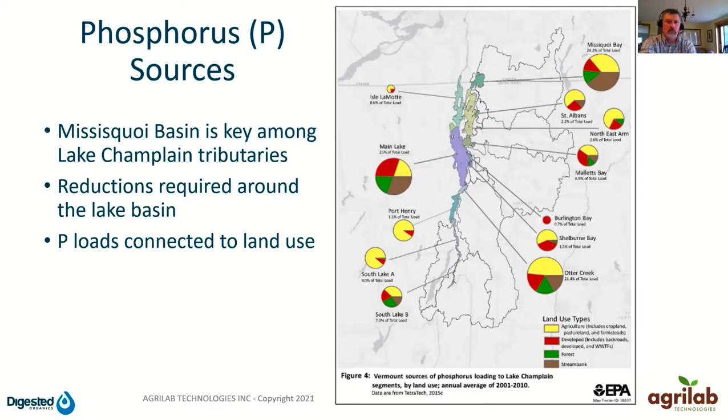Our company's based in Franklin County, so it's a lot of our effort you'll see is focused there.

So this issue has not gone away. There's been a lot of great work, not only with farms, but with all areas of developed landscape, conservation practices. But for multiple reasons, we have not made as much progress on phosphorus reduction in recent years as people would like to see, given the amount of money that's been put towards this.

There's been a lot of great research on trying to identify the most sensitive parts of the landscape that are, whether due to soil type, slope, or their land use, have a disproportionate amount of phosphorus loss into these different rivers and ultimately Lake Champlain.

Phosphorus, you could say, is sticky. It is not, most of phosphorus are in forms that aren't soluble. So nitrogen is more soluble in terms of being percolating or infiltrating through the soil profile, or being volatile and leaving as ammonia as a gas, where most forms of phosphorus are physically attached to soil particles.

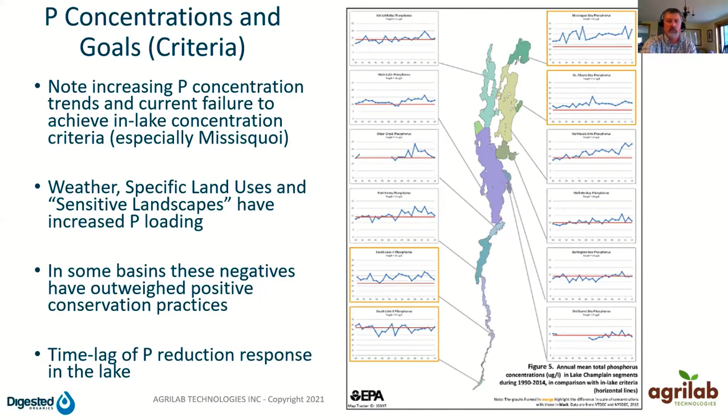You may see improvements in a watershed that you've established more tree buffers, there's been good land use practices, but because that phosphorus in the sediment is now embedded in the river and lake channels and then in the bays, there's continuing to be phosphorus cycling in these water bodies, so you don't see an immediate downstream water quality response.

Another way to illustrate this is different watersheds obviously have different land uses. You can imagine Chittenden County is a lot more developed land use. So in the Missisquoi Basin in particular, there's a lot of loads that are related to agriculture, stream bank, which is a combination of in-channel and bank erosion, and forest.

Typically forests don't generate a lot of phosphorus per acre, but in a lot of these mountainous and large rural watersheds, they cover quite a bit of the land use or land area. So they add up to be a significant total.

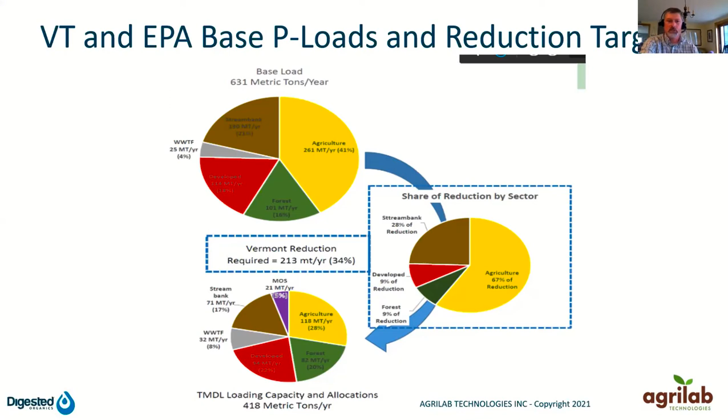So again, some of the conservation practices and programs, both through regulatory and incentive programs, have been trying to address this. But I believe the intent of the Vermont Phosphorus Innovation Challenge was to try to find yet other pathways to come across some solutions to address this phosphorus loading issue.

So just some broad methods that have been incorporated in those existing programs and general best practices in general is strategies that have been known and need to be employed in more widespread.

So manure applications are obviously a big one related to dairy and livestock agriculture. You've got an existing winter spreading ban in place for part of that. A lot of the nutrient management plans talk about setbacks from streams, application rates, and other things, combined with good soil building practices.

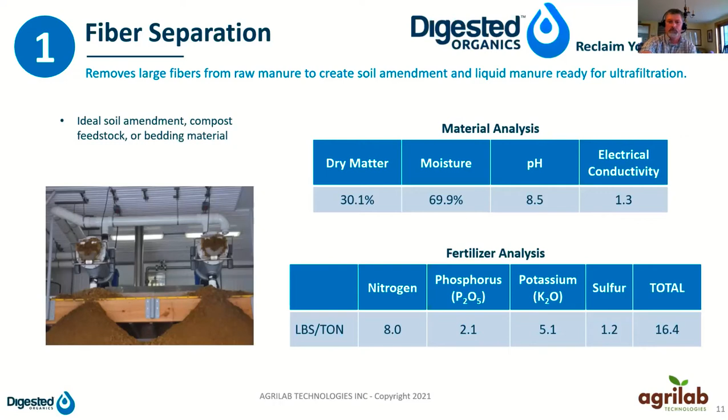The ultrafiltration then takes the resulting liquid that's had the coarse fibers removed, and runs it through these devices to squeeze out or permeate the water or filtrate, leaving a thicker sludgy concentrate at the center. In manure, the biggest fraction of the phosphorus is held in the fine particulate. You may remember I said phosphorus is sticky. It sticks a little bit to those coarse fibers. Some of it stays suspended, but the biggest fraction sticks to these fine particulates, the small amounts of organic matter.

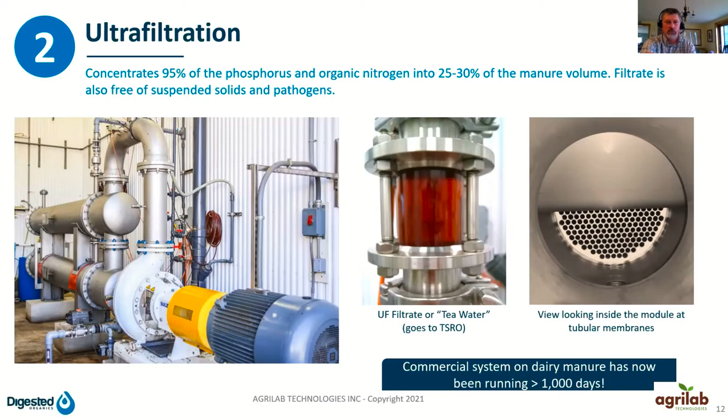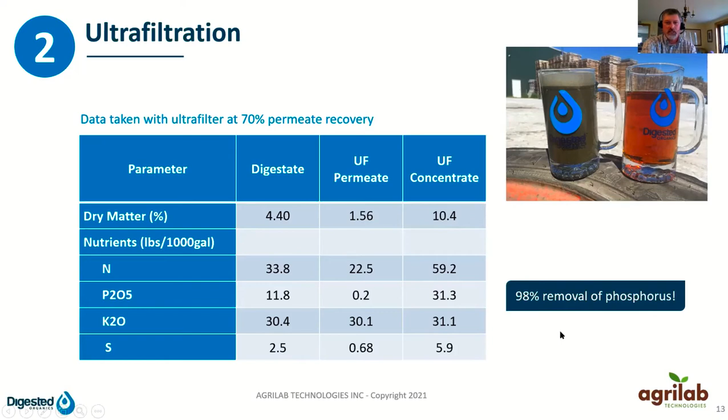Most importantly, 98% removal of phosphorus in ideal conditions.

So the conceptual high-level benefits are that you're able to have your phosphorus concentrated in different forms, and you can target where that's applied to the fields that have the phosphorus need for growing corn silage or other crops, applying at higher rates that permeate and distribute it. Oftentimes the fields closest to the barn have had historically more spreading of manure and higher soil phosphorus levels, so you can apply less material to those and more material to the fields that are further away.

This is one of their full processes, sites that actually take this step all the way from dewatering to the ultrafiltration to the permeate, an additional reverse osmosis step, ultraviolet disinfection, and then can discharge clean water to a waterway. I believe they've been permitted to do this in one or more sites in Wisconsin.

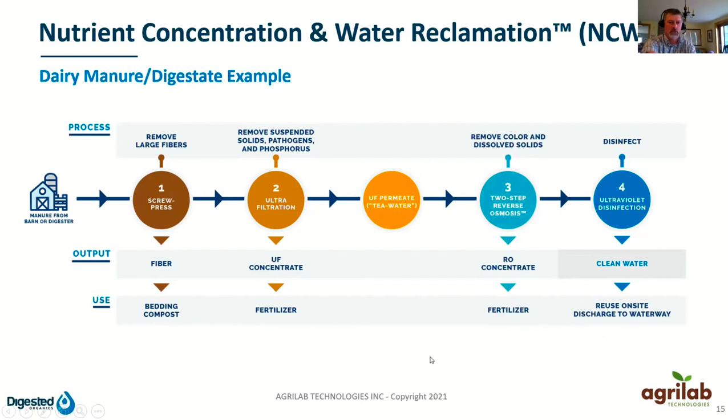What we're doing here in Vermont in collaboration with Digested Organics is this more three-step process. So with 1,000 gallons, you remove about 10% of it in terms of those coarse fibers, and the remaining 900 gallons gets sorted into about 225 gallons of concentrate typically, and that permeate in most cases will just go back to the manure lagoon and get land applied as previously.

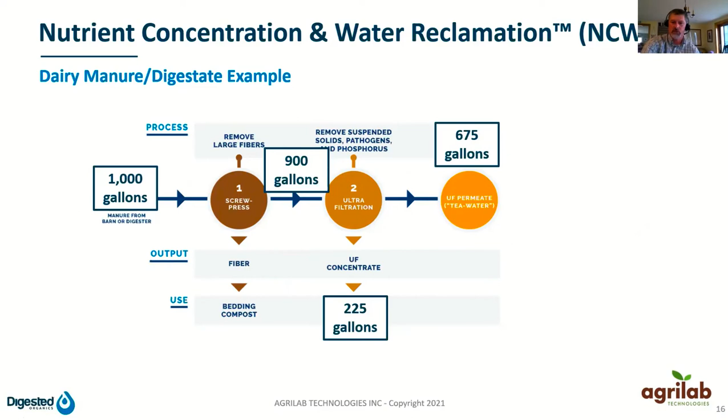So we teamed up in stage 2, and they were happy to work with us to see if we could blend their concentrate into batches. We started the mixing at a bucket scale, 5-gallon bucket scale, then we went to the bucket loader scale and did different scale batches. You can see the recipe there: about 10% concentrate mixed in with separated manure solids and some wood chips. It turned into a good batch that physically looked very similar to other compost that you would normally buy.

Most importantly, 3 times the total phosphorus, giving a fortified compost product appropriate for applying to a field that had both a need for organic matter and for higher phosphorus fertility. Certain crops like corn silage, peppers, pumpkins, and hemp still have a significant fertility requirement for phosphorus, so those may be some of the best matches for a product like this.

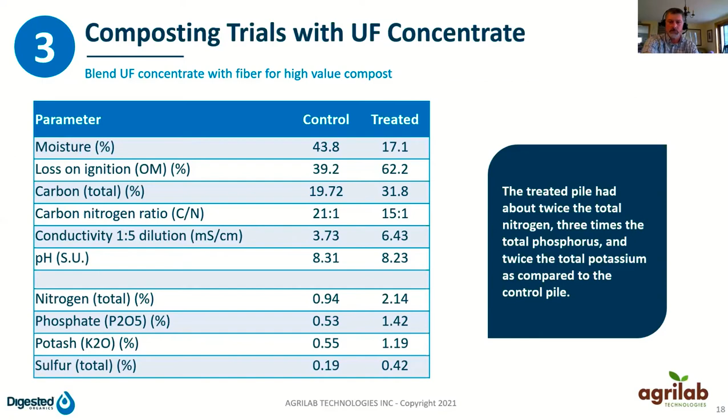Digested Organics also did some modeling of how they could set this up and replicate it in Vermont. This is some work I believe they did with Middlebury College, looking at different places in the Missisquoi Basin in Franklin County, in the Winooski River Basin in Chittenden County, and down in Addison County, Otter Creek, where they could have centralized facilities and potentially bring in phosphorus concentrate from a range of farms, do some centralized processing, and then redistribute it.

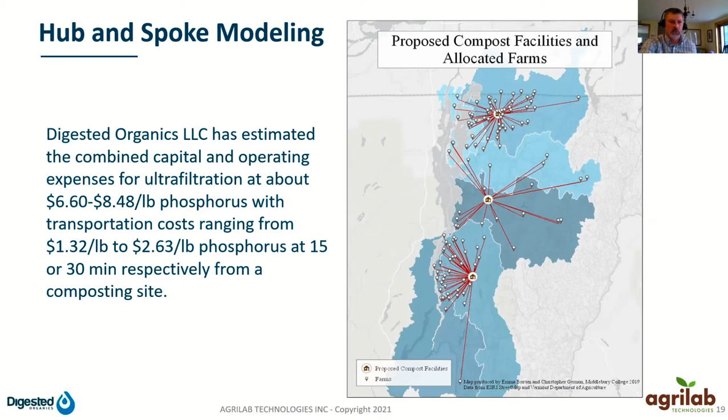So at least they set up a conceptual model and did some estimated costs.

In parallel, we were doing our own work and got to collaborate with Digested Organics on some pieces of this. Our company has been working on composting projects for a number of years, and our biggest focus is on systems that both aerate compost piles and recover heat. The primary benefits are process acceleration and control, but we're also able to extend winter operations and use the recovered heat from the process, just like solar thermal or geothermal, where we get heated water and glycol, and we can heat greenhouses or shop floors.

Preheat wash water on farms. And then more recently, we're applying that to a second heat exchanger to dry down compost or other products before they're screened, bagged, or transported. So using these processes and equipment we've developed, we thought this project was a good fit because we're dealing with these high moisture, dense products. So how can we add value to those?

So we set up some prototypes in stage 2 and got to work, as you saw, with the sponsor Vermont Natural Ag Products, the Foster Brothers Farm in Middlebury. We tried to do a number of prototyping tests for everything from the process to the products that would be attractive to end use markets, but also economical to make.

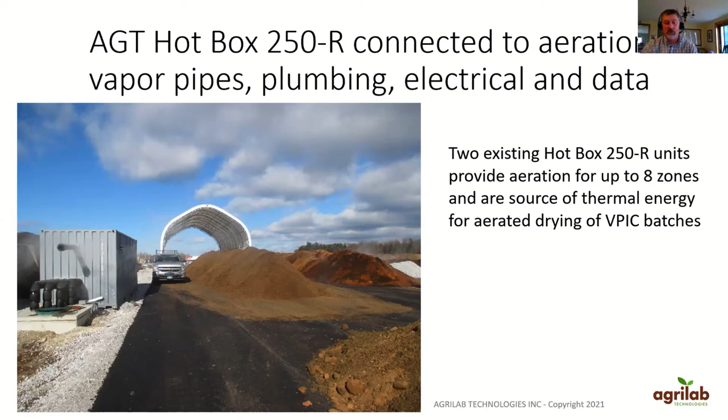You can see in this slide, the shipping container is where we have our aeration equipment, which I'll show you an illustration of after this, but it pulls vapor through those piles out on the pad, through pipes underground, up into the container, through a blower and heat exchanger equipment, and then you can kind of make out the steam coming out of the pipe at the top of the container - that's exhaust coming from those piles sitting at the pad.

This schematic or process flow diagram shows that in a little more detail. You can picture this equipment sits inside that shipping container. We have different ports that this connects to for the piles out on the pad. There's an aeration blower that provides the suction to draw fresh oxygen into those piles so that it speeds up their process. It draws that vapor across a specialized heat exchanger in the center of the equipment.

That's where the water and glycol loop is heated up for on-site use. We also have a lot of sensors on here, so we're able to track temperature, oxygen levels, flow rates, and use that to adjust controls in terms of how long each batch is aerated and at what level of fan power.

And then ultimately, through controlling a series of valves, we can either exhaust the vapor out to the air, like you saw that plume of steam, or if a pile is cold or freshly mixed in the winter, we can push hot vapor into another pile in order to boost its temperature, get it started, and not have to be in cold winter hibernation mode.

The takeoff, again, is this water loop. So here we've got a water loop that could go anywhere - to heating the shop floor or bagging building on the site, or to a second heat exchanger where we can heat up ambient air and direct it through positive aeration into these piles.

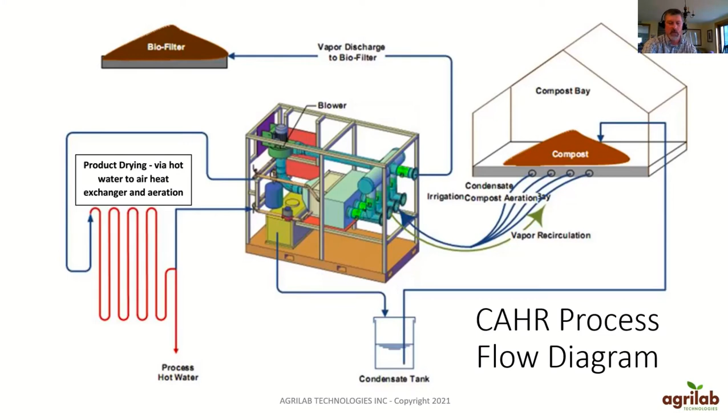But 150-degree air being forced through materials certainly is a good batch drying process, and we were able to show that. This next slide illustrates the source of energy we're working with. It's a cool looking picture - it's actually their straddle turner just went through the windrow, so the pile gets all blended and mixed, but you can see how much steam, both water vapor and carbon dioxide, is released when that happens.

For the piles that are solely turned with windrows, they may turn it 14 times over a 4 to 5 month period. With the aeration, they need to do it less - maybe 6 times over a 2 to 2.5 month period. The point is, all that steam and energy going off into the air is instead being pulled through that pipe network into the heat exchanger, anywhere from 10 to 12 times a day based on a time schedule. So that's our thermal input, that's our energy input to the system, and that's what we're taking advantage of here.

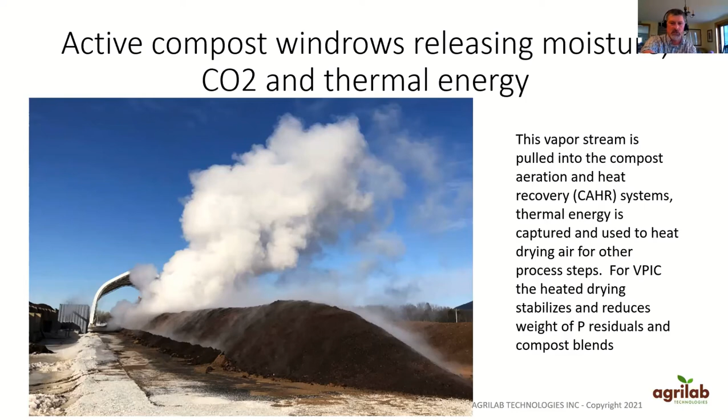And in this case, for VPIC, we were directing that energy to drying down some of those phosphorus residuals, concentrates, and compost blends. All right, now here is the concentrate.

This was at the bucket scale blending when we were first trying to figure out the best proportions. This is the concentrate from digested organics. You can see it's a thick material, but it's very homogeneous and it flows. So in that sense, it was the most attractive phosphorus concentrate or residual to incorporate into a compost batch. Again, impressive that 95% of the phosphorus is concentrated into that original 25% of the liquid manure.

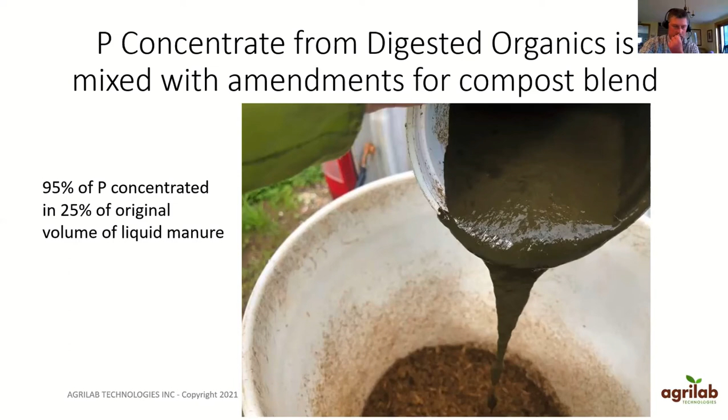We talked about the DVO dissolved air flotation sludge. This is also very effective at removing phosphorus from the material, but it was very difficult to then handle this material and incorporate it into a compost blend. We literally had to use 3 times as much amendment - wood chip, bark, sawdust, manure solids - a lot more physical mixing and handling up front to try to get it to blend in. It made a decent product in the end, but all that cost didn't make it attractive to continue making compost blends with this as an input.

The other factor is these DAF sludge materials typically also involve a polymer to enhance thickening and phosphorus recovery, whereas the digested organics ultrafiltration project is solely mechanical. Some of our end use markets are targeted towards organic agriculture, and use of the chemical polymer would prohibit that from being used. So it limits some of the end market potential.

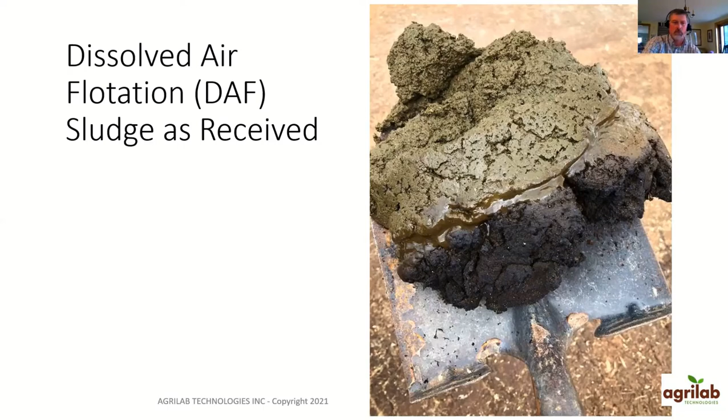I think it could be a successful product. I don't think it has as high a phosphorus recovery rate, but it already kind of looks like compost or manure solids, so in terms of incorporating it, it could have some good potential. It was just a little dense. So the drying and aeration was a potential benefit of working with this product, and perhaps we will in the future.

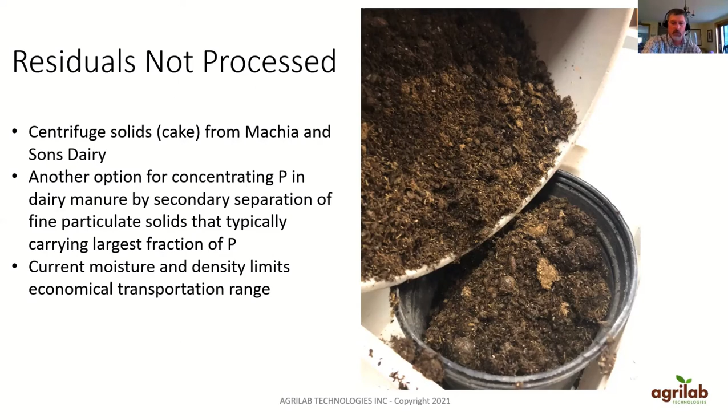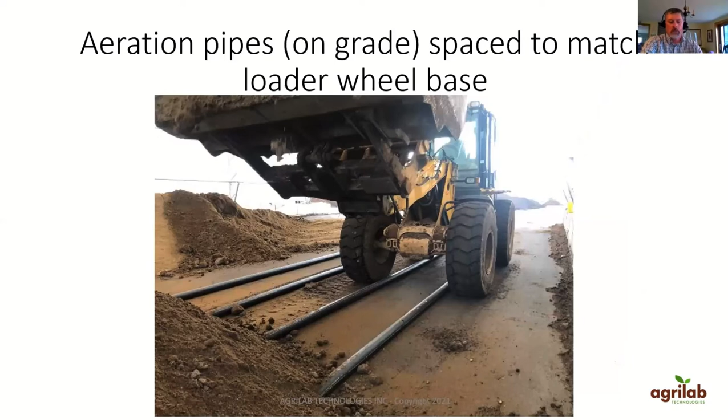And that was the benefit of pushing the heated air through these batches after they reached their targeted time and temperature to be called compost and kill pathogens and weed seeds - but it also dried down the product further so it could be more easily stored, blended, and transported.

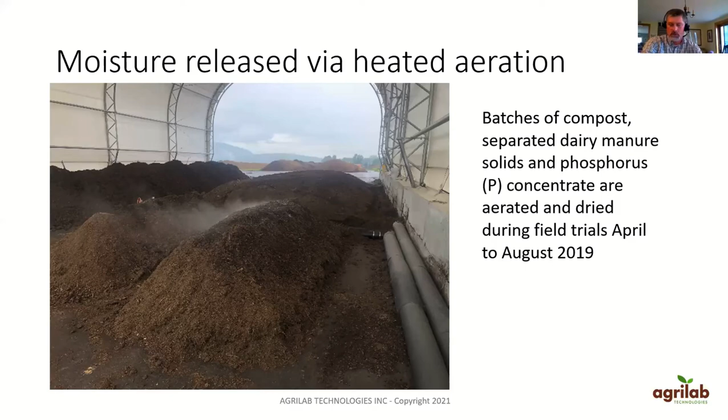Just another shot of that. You can see in the background, that's our trailer that had the temporary aeration in it.

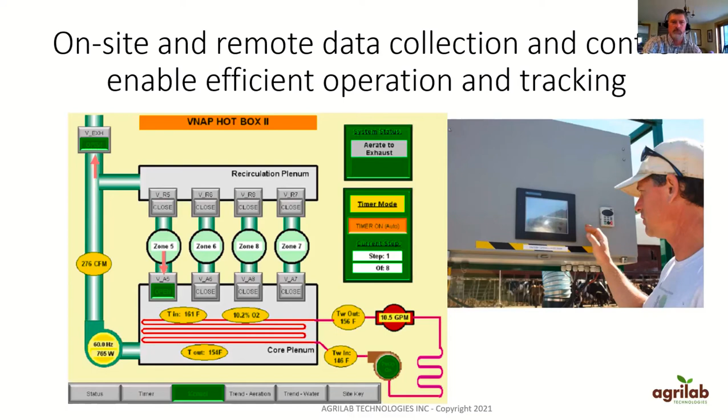All right, so on to stage 3. So that's where we are. We did the stage 2 report back in late 2019, and we were very fortunate to get accepted for further funding. The premise of the stage 3 effort was to set up a network of on-farm sites to do a mixture of some of the processes and create some of the blends we prototyped in stage 2.

So one of our goals was to try to collaborate more closely with Digested Organics. Compost certainly has phosphorus in it, but for us to start moving more meaningful volumes of phosphorus, we needed to collaborate with them to get that concentration.

This is a good map that illustrates our focus in northern Vermont. We continue to use a range of sites in different watersheds and counties. Foster Brothers, Vermont Natural Ag Products in Addison County, will primarily be a partner later on with distribution, once we start to create larger volumes and consistent products that can meet the quality demands of their existing line.

And then the red star is up in Franklin County, one of our partners nearby for where we're based, the Magnan Brothers dairy. Missisquoi in northern Lake Champlain has some of the highest phosphorus loading rates, so it made a lot of sense for us to focus our early efforts there.

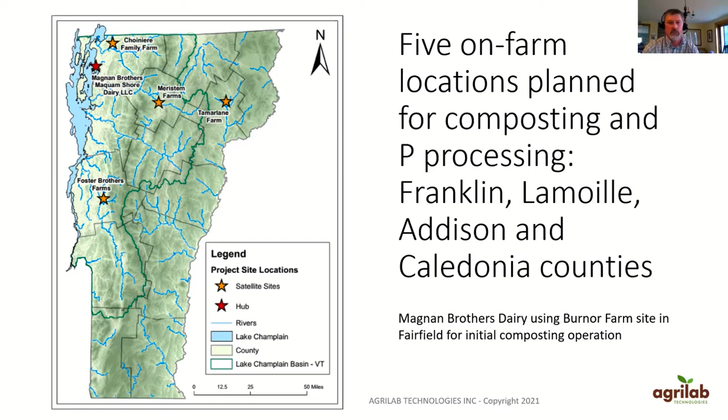Other farms shown here have other needs, either as producers and/or end users, or would be good distribution points in addition to using it themselves. So again, we're trying to not only show that this is technically feasible, but more importantly, actually economically viable. That's really what we're digging into now, trying this collaborative approach between a network of sites.

So as we got into this phase 3 activities, we looked at the different partners who signed on to support the project, and then got into the specifics of where the most viable processing and composting locations were on their farms.

Tamarlane Farm has gotten a lot of discussion in the last several days. It's a smaller farm, so we're not necessarily looking to make our most of our product there, but they could also incorporate some of the blends into their process and be an end user themselves.

Just running through quickly some of the site details. Each of them have their own unique aspects. The Magnan Brothers are a dairy farm based in Fairfield, but they have a second milking facility and dairy in St. Albans. That gives them, they were space limited at their home farm in Fairfield, but this also gave them crop access down near St. Albans Bay that can have different weather conditions.

So it was a bit of a hedge in terms of weather being slightly better or worse in the two towns at different years. But ultimately they are interested in the manure separation, both for saving bedding, but this was a new opportunity to diversify their farm revenues and activities and potentially use the heat recovery for composting. So we have a site that we scouted out there, and Jason McCune-Sanders on our team did some mapping and drawings.

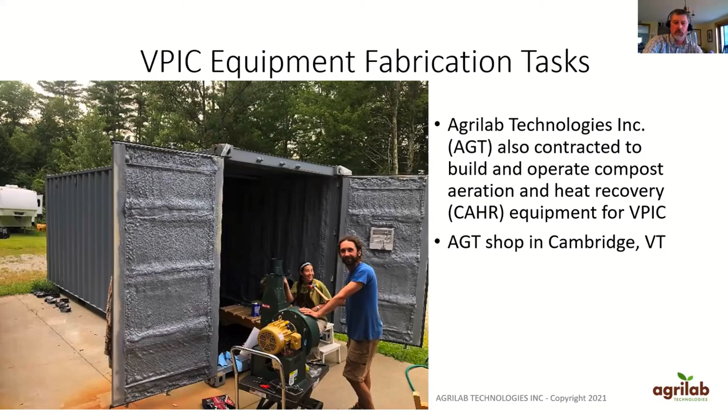We're mounting this equipment into a 20-foot shipping container that will be deployed at one or more of those farm composting sites. And being the title of the presentation, I wanted to make sure I answered the question: why are we using compost heat recovery? I think I've covered it fairly well, but again, we're able to move around to these different sites with this modular equipment.

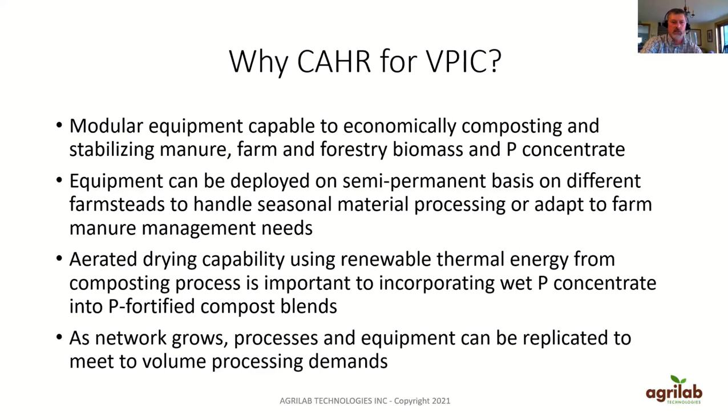It can be redeployed if the circumstances change on any of the individual farms, or if it's just a seasonal need. And then we can use that renewable thermal energy for that drying process, again to incorporate more of that wetter, denser concentrate into these blends, and try to make it replicable if we're able to have an impact beyond these initial sites and make it more statewide.

Again, the thermal energy - Jason's working on the plumbing system in the unit for this project. That's how we distribute the water and glycol around the system, whether it's heating buildings on site or, in this case, more so for the product drying.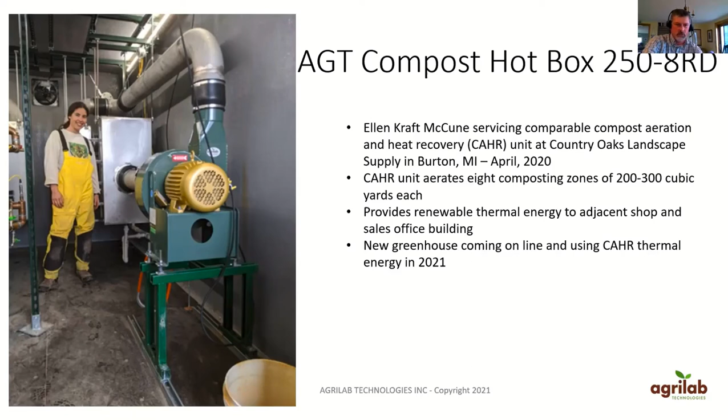I think they're running something like 30,000 or 34,000 yards a year with this single piece of equipment on the aeration, and it's really sped up their process. It also provides heating to their adjacent shop and greenhouse and sales building, and they've just built a greenhouse and are going to be plumbing in that for the heat as well.

Just to show what it looks like - at the back of the container, these are where the pipes to the aeration zones come in. Jason is setting it up, and we have a sump at that site to handle any of the condensate from all that hot vapor in the pipes, as well as any leachate from the active bays.

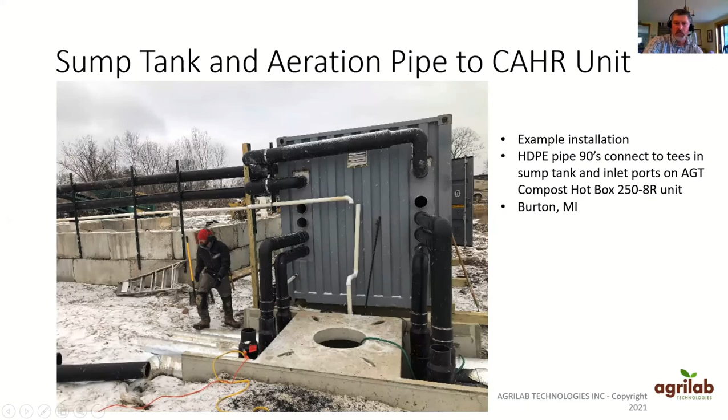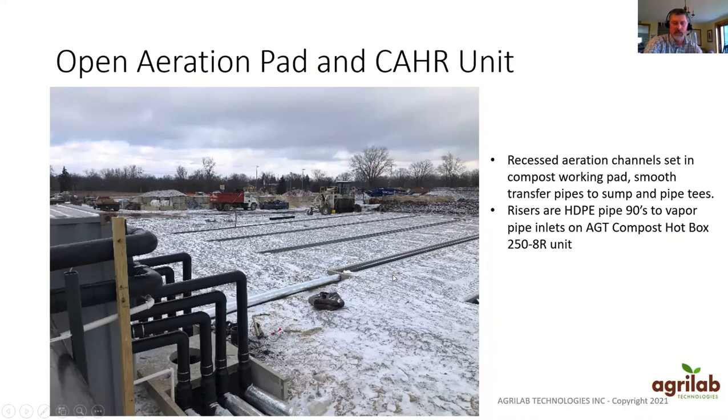Here's a view looking out towards the pad during construction. In this case, the pipes were built into recessed channels, so a bucket loader can run clean over it and scrape. We also do what some of you have heard called pipes on grade, where the pipes are set on top of the working pad, and the equipment just has to straddle it and avoid hitting the pipes.

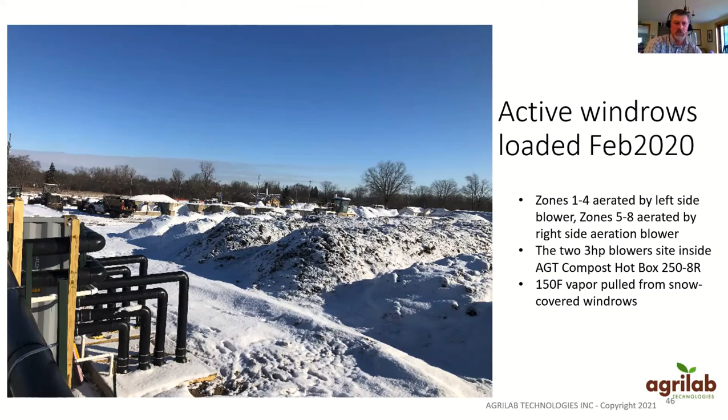Same view with loaded compost and even a coat of snow. I'm still amazed, even after years working in this, that you can have that cold fringe of the pile and it'll hold snow, but in that big core of the pile it's 150 degrees. The vapor gets pulled through pipes underground, up into the back of the container, and then we're heating the water and glycol up to that temperature.

Back to Vermont, zoom back into here. So this is what we've been working on this spring. Originally we were looking with the Magnan Brothers at that McQuam Shore Dairy site in St. Albans, but because they still had construction and cleanup work to do down there, one of their farms where they raise heifers and calves in Fairfield conveniently had an old feed bunk - you can see that big rectangle on the far right-hand side of this picture that was not being used. It even had a leachate capture at the north end, which allowed any runoff from the original feed storage and now compost to drain directly into the manure lagoon.

So we didn't have to spend extra effort setting up new runoff controls or leachate capture and treatment. We didn't get started with the full compost aeration heat recovery unit there first because we had to buy some pipe, so we used our temporary setup with that same compost heat wagon or aeration trailer to lay out some piles and get started making some batches this winter.

So we'd at least have some product ready for the spring. I said it was kind of like training wheels on a bike, because it was also great for the Magnan Brothers to get familiar - they had done windrow composting in the past, but this let them get used to building batches that would be good for an aeration system, figuring out straddling the pipes, recipes, and all those other nuances.

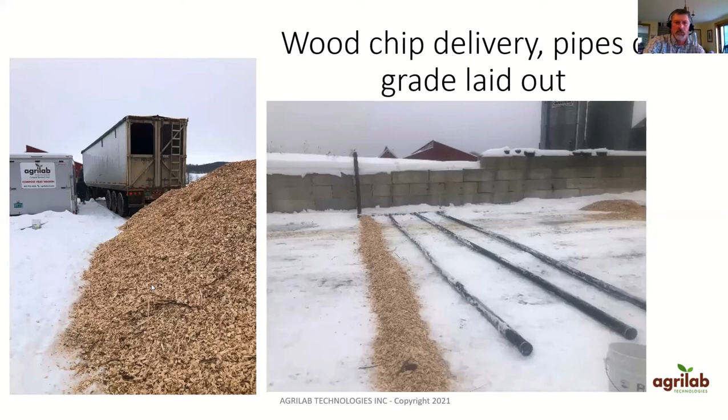So here's a picture of one of the batches we're making. Again, the pipes come out of the unit. We had a single aeration blower inside that was just pushing positive, so no heat recovery at this stage, but we got at least more familiar at this site with the aerated process.

And as Caitlin mentioned, the COVID delays - typically we'd get a pipe order in 3 or 4 weeks, but it was closer to 8 or 9 weeks to get the order in. May not have just been COVID - I think some of the pipes were going down to Texas and other places that had that big freeze in the winter, and a lot of things burst.

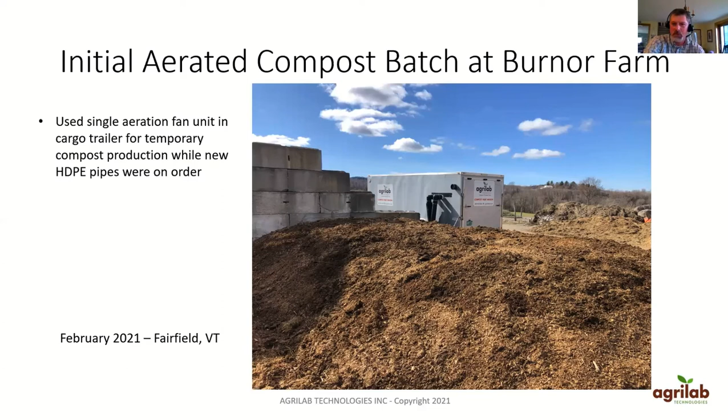These are just lovely compost shots for people who care about frost and steam coming off of piles on a cold morning. But point being, we did work out the aeration process to my satisfaction at this site, meeting all the time and temperatures to be considered compost - aerated system being 131 degrees or greater for 3 days.

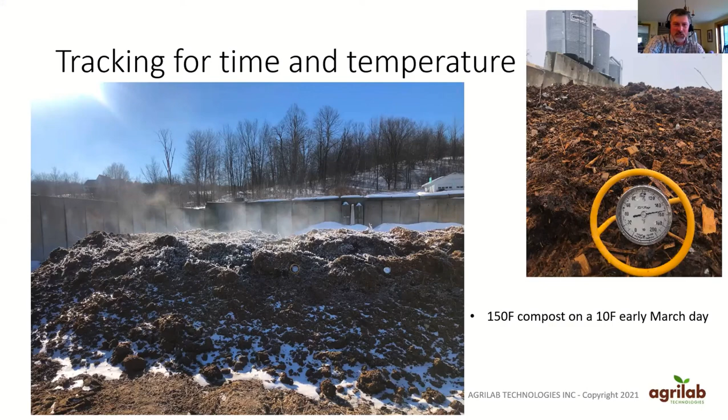So we've got composted manure mulch. Again, just a nice sunny day, a good farm picture of the setup there at the Burnor farm.

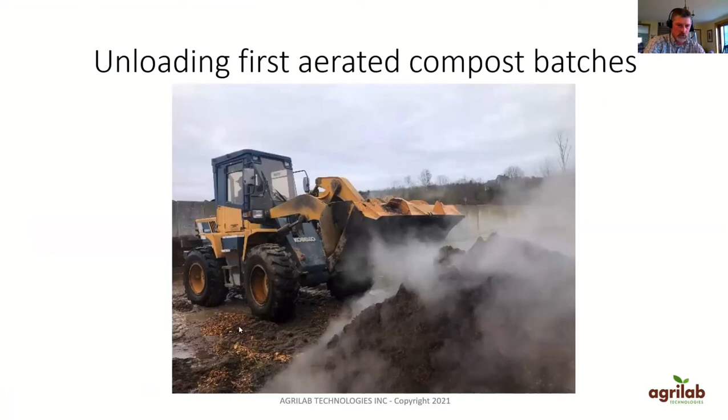Just in the last couple of weeks, we cleared off those existing aeration lines. You can see the pipe manifold just being exposed a little bit. So we're working with the operator to be careful breaking down the pile so that we don't destroy or break those pipes on grade.

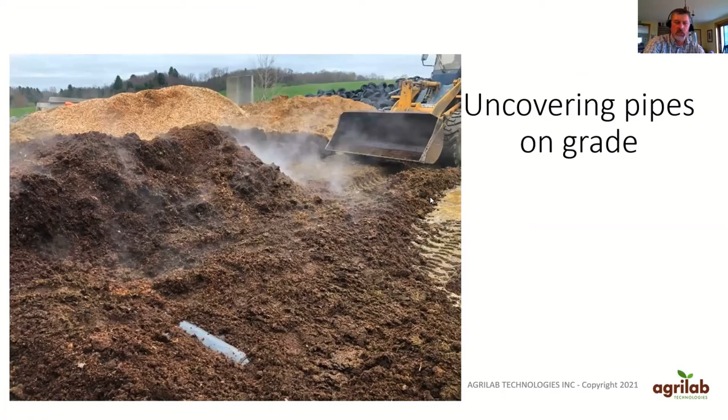And because there was a lot of chips in this, it won't be just manure, and we're not going to screen this batch. It'll be sold as a composted manure mulch.

So what's coming? Here's some drawings. This is to be placed in that same bunk - an overhead view in the top left, and a 3D view in the lower right. The pipes will go into the back of the container. It'll sit in that south end of the feed bunk, and we'll be able to do a series of aerated rows using the available space.

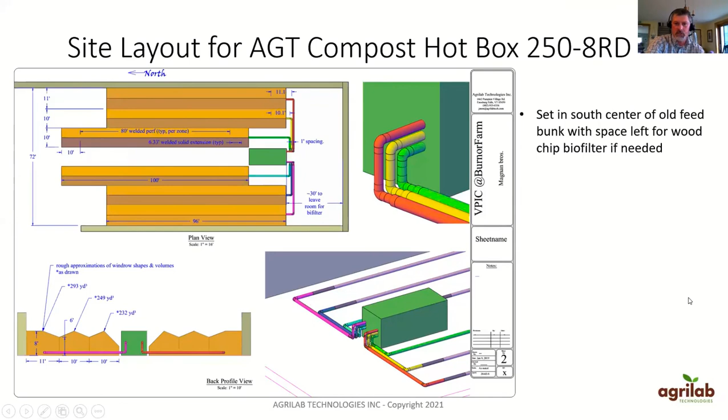Lower left, you can kind of see a profile of the different piles, with the hot box unit in the center. And just a shot of the unit at the shop with all those pipe ports that will connect to those pipes on grade. The ports at the top are where the exhaust comes out from the compost piles.

We are leaving space in that bunk to put in a wood chip biofilter if we feel it's necessary - either for odor control, noise, or not having a plume of steam suspiciously coming out of the back of our equipment in close view of the road.

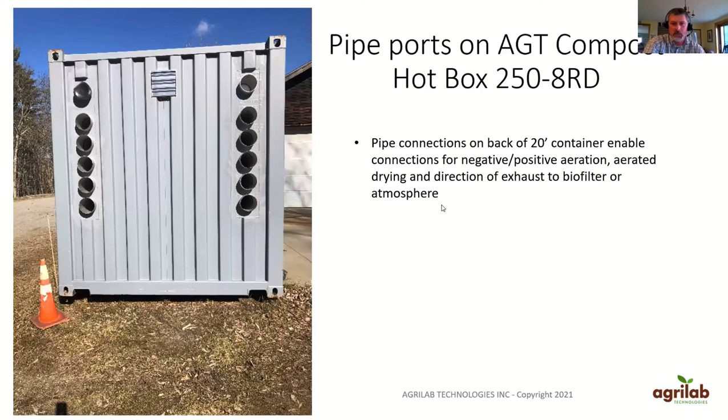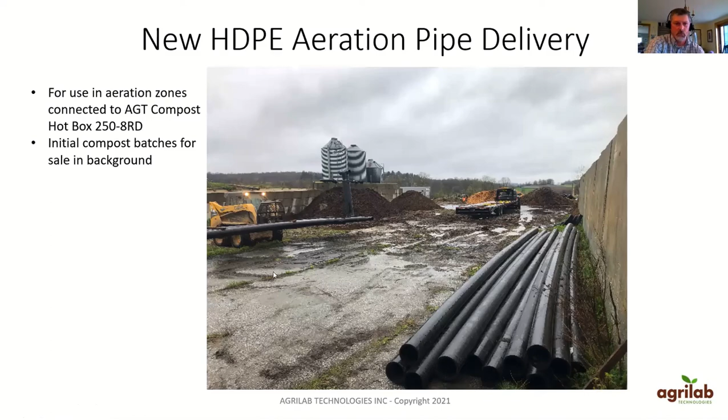So this is last Friday. The pipes finally came. They come from a company whose manufacturing plant is in Kentucky or West Virginia. These are some of the long perforated pipes that'll go under the piles, and these are some prefabricated sections with solid pipe that'll connect into the back of the hot box. We'll also do some fusion welding, a heat process to physically weld together those sections of pipe so they're more durable. We also use some Fernco couplings to connect some of the other joints.

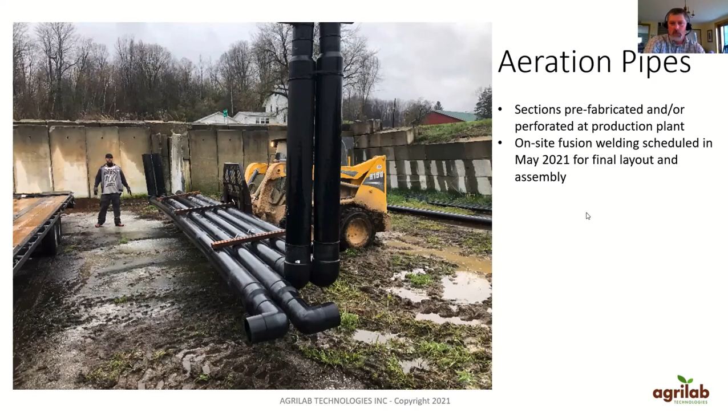So the last couple slides before we finish the presentation and get into Q&A circle back to the ultrafiltration. Our expertise is mostly around the composting side, but to really make impact with this project, we need that phosphorus concentrate in order to move more phosphorus out of the manure, get it out of areas that have too much, and get it to places that still need it in a form people are interested to use.

So this is a drawing of Green Dream Farm up in Franklin, near Lake Champlain, Chris and Annie Wagner's farm. They've been composting for years, but agreed to host the Digested Organics ultrafiltration unit. They've got their dairy barn and an existing screw press separator. The manure will go down to the ultrafiltration unit. Some of it, the permeate, will go to a manure lagoon, and these tanks in the lower left are where the concentrate will be accumulated.

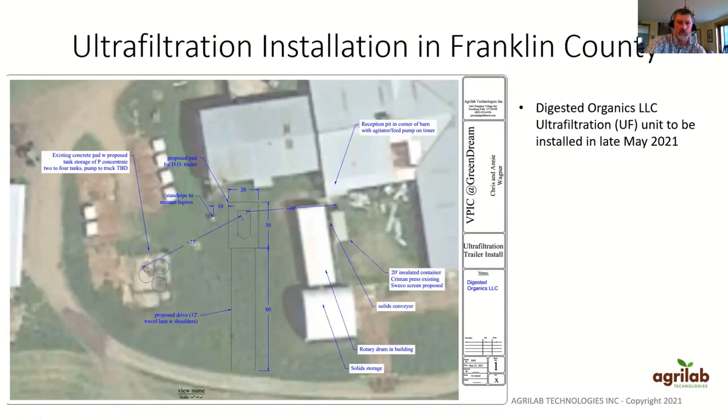We'll periodically, during the growing season, coordinate transportation to field applications, some field trials, whether for forages, hemp, sunflowers, or other things, but we'll also transport some to the Burnor farm for making those phosphorus-fortified blends. One reason we were happy to work with Chris and Annie at their farm is they already had a screw press separator in place, and they already had three-phase power, which the ultrafiltration unit required, and not all farms have.

And again, this is the first step. The liquids after the screw press, or primary separation, go into the ultrafilter, and that device is far more effective if you're not clogging it up with the coarse fiber.

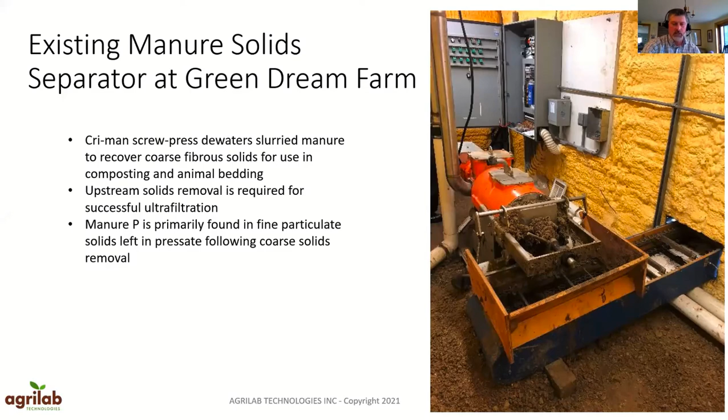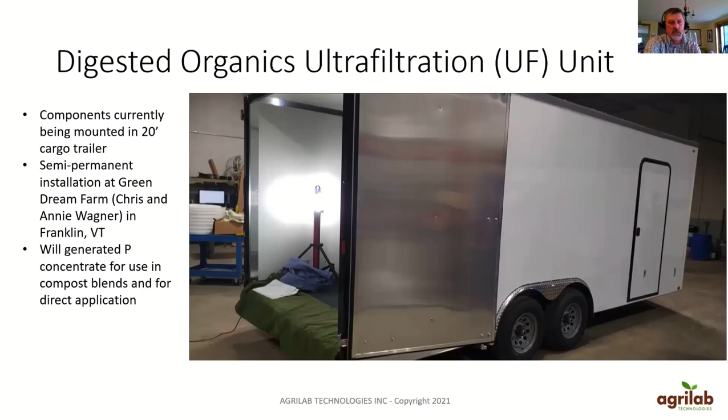To summarize the next steps: we're going to do some yield trials. One of the great things is some of the yield trials are going to be right with the farms that are also the processing sites. So Magden's, Schwanier's, Tamara Lane Farm have all agreed, as well as some other locations, to be trial sites so we can both evaluate the yield results from using these different products, as well as the cost associated with it.

We'll do some initial sales to get on the radar of people that this is a new composting site, and we'll have some products for sale this year, but increasingly in years to come. We'll try to develop additional product lines that match customer needs, further develop more sites, hopefully multiple sites with the Magnens and some of those other sites we have planned, and get them into actual implementation. Then circle back on business planning, asking are we pricing this to match the cost of production, and are we really targeting these products to the right markets?

For documenting and measuring the impact of this project, we've got to do a lot of tracking. We've got a new member of our team, Jay Grannon, who's going to be helping us with this effort, tracking all the inbound and outbound flows. We've got a lot of different feedstocks, so it requires a lot of sampling, a lot of spreadsheets, and ultimately it's got to be tied into the nutrient management plans on these farms. So even if you think you're doing the right thing, you've got to track the numbers and prove it, so people will know this was a good investment of the state's and everyone's time.

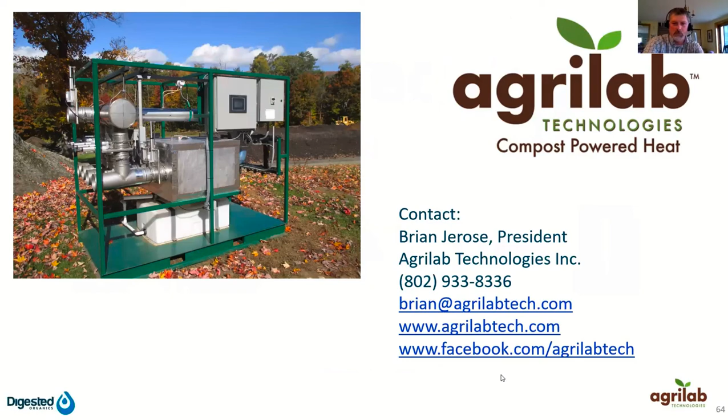We did have some questions come in, as well as some other resources shared, but I'll start with one of the questions that Carrie just posted: what was Vermont's investment in this project over the 3 years?

For our company specifically, we got $50,000 in stage 2 to do the prototyping. That was 2018 and 19, to set up the equipment down at the Fosters and some other field trials. Then the next round, stage 3, we got $330,000. So it's a 5-year agreement, with different categories.

We had to do additional market research. We had to do a lot of site improvements and cost sharing on the 5 different farm sites. And then we had to build the equipment with some cost share and produce a certain number of yards of material through the system over the 5-year period. So we're obligated to meet a number of targets in a 5-year period.